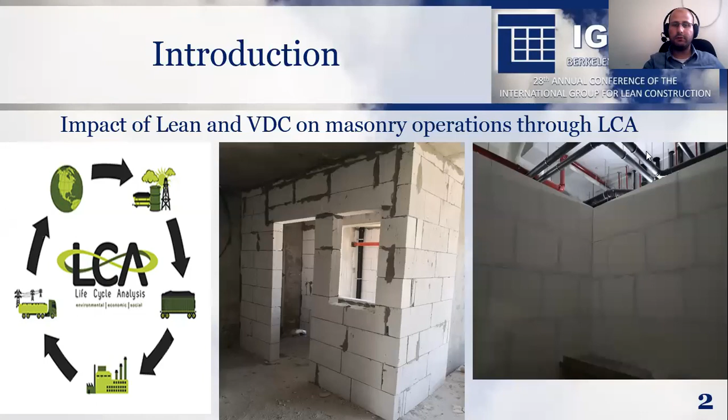Literature review. Lean production has had a transformative impact on building construction projects in which it has been applied. Waste includes the exhaustion of time, money, and energy that returns no value to the end customer, and it's the most important variable that Lean aims to minimize. Virtual design and construction, VDC, is a practice in which both construction products and related construction processes are modeled collaboratively and in detail using building information modeling tools.

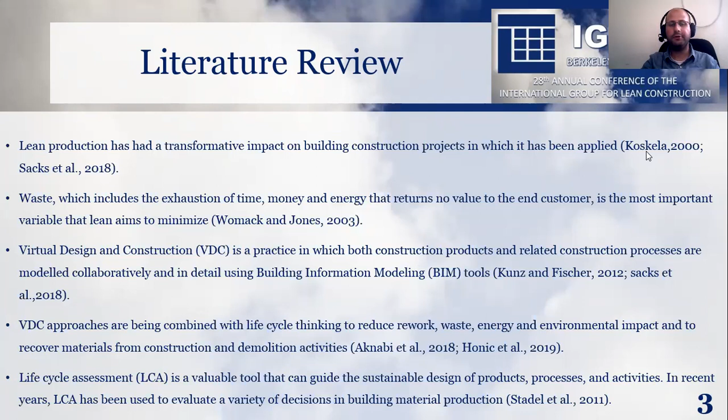VDC approaches are being combined with life cycle thinking to reduce rework, waste, energy, and environmental impact, and to recover materials from construction and demolition activities. And finally, life cycle assessment is a valuable tool that can guide sustainable design of products, processes, and activities. In recent years, life cycle assessment has been used to evaluate a variety of decisions in building material production.

The research questions, or in other words, the goals: to what extent can Lean and VDC improve masonry block operations? Can they reduce the non-value adding activities? Second, how can they reduce the wastes, which we can translate to: what are the environmental impacts?

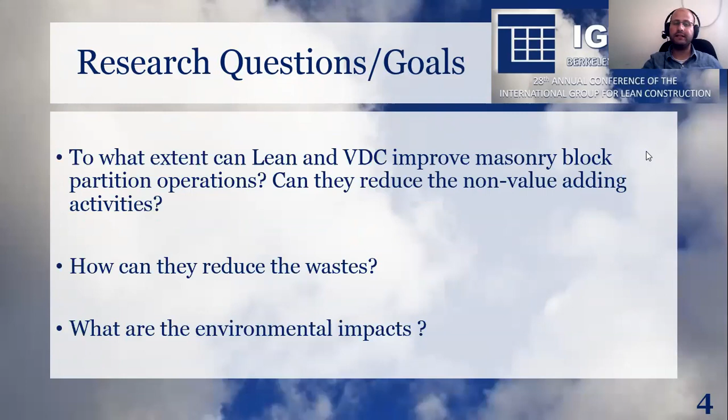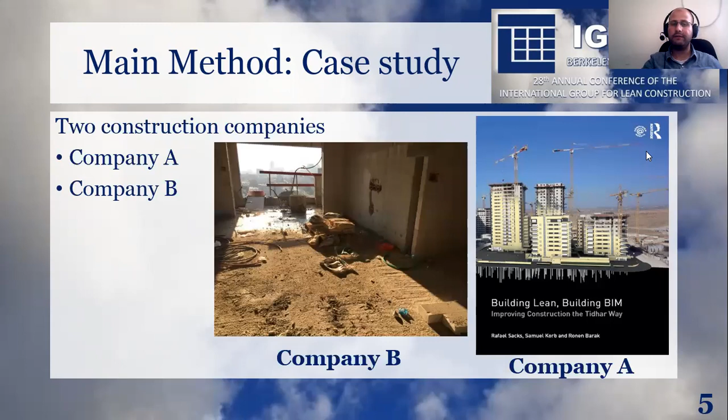The main method is a case study. We studied two construction companies. The first company, Company A, is Tidhar Company. It's a leader company in the area of Lean and BIM. They started their Lean and BIM journey in 2011. The second company is Company B, which until now works in the traditional way, or in other words, the original process. In the quantitative research sources in this study, we include four projects.

Two of them had already been studied by Technion in 2007 and 2014 and are related to Tidhar. The third project is a project for Tidhar, but after they started Lean and VDC, in 2019. And the fourth project is a traditional project from a company in the market.

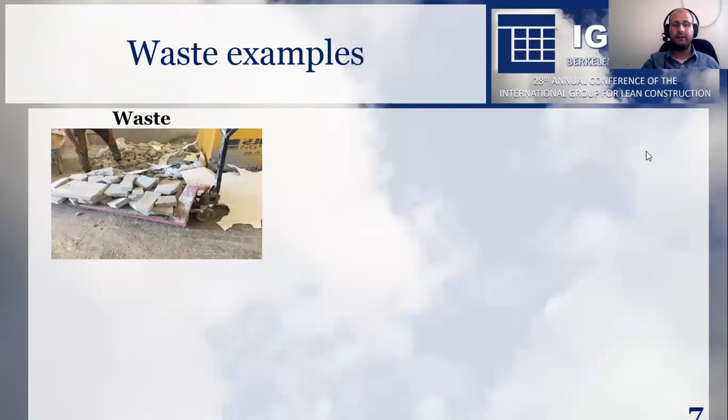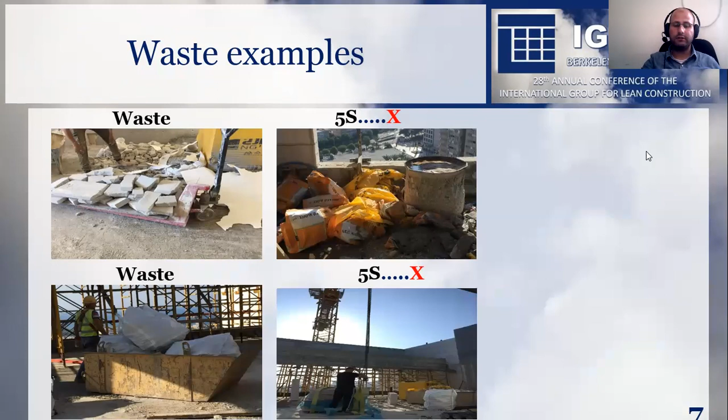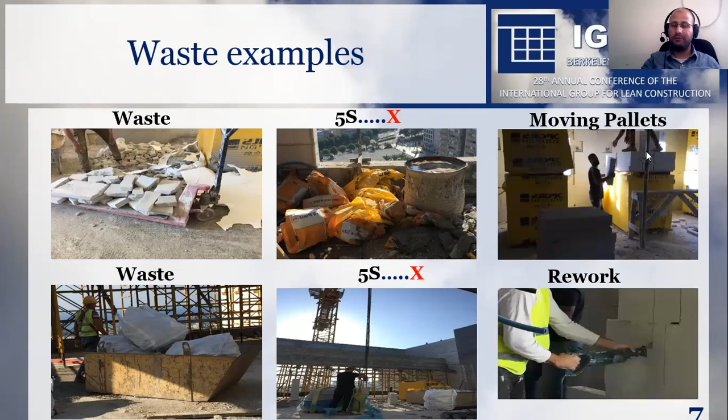There are some examples of waste in the traditional company. Here we can see waste of materials. The 5S, like here, the site is not clean, the work environment is not sorted. Also, the workers don't take safety considerations during the construction. Moving pallets and lack of coordination between different contractors and disciplines lead to a lot of rework.

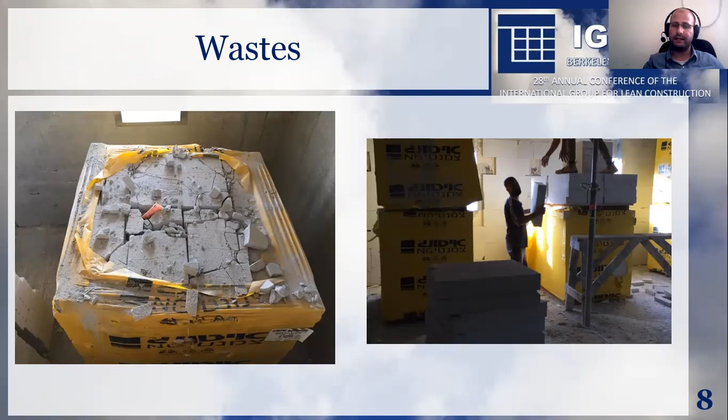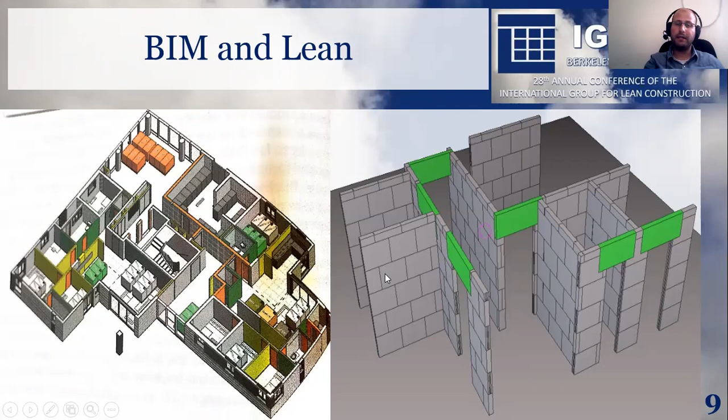Now, at Tidhar, which implemented BIM and Lean, they modeled all the walls using Revit, extracted the quantities from the model, and made a plan to distribute the different types of blocks. They used white gypsum block, green gypsum block, which is used to resist water in the toilets and kitchens, and the Ytong block. Also, they modeled all the blocks in their model in order to see the proper size for the blocks, so they minimized the cutting. They made the blocks a multiple of the wall.

Now, findings. The results were eye-opening. Project A1, which is traditional, the value-adding activities was 34.5%, and this in 2007. Now, when we made the study in 2019 in the traditional project, we see that until now the value-adding activities are only 35.8. There is no improvement.

While in 2014, when Tidhar made the study to evaluate what is the lean impact, the value-adding activities increased to 63.6%. Now, when we measured it in 2019, for lean and VDC, the value-adding activities increased to 68.4, and this is due to the role of VDC in reducing the cuttings.

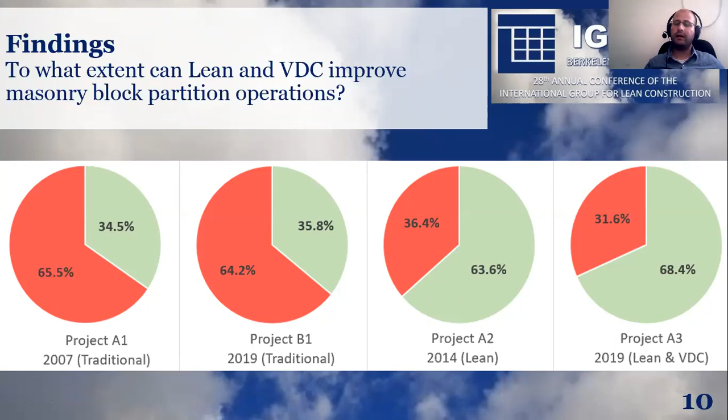Now, this table shows us the comparison between the four projects for the work activity. The first row shows us the value-adding activities for the different projects. Now, the non-value-adding activities here, we can see that in the traditional project it's 12.6, reduced to only 1.3 in the lean and VDC. Moving pallets reduced from 19 to 4.8. And for the other, cleaning, marking out, scaffold.

And the last one shows us that design changes are reduced in project A2 to 5.2 in lean, which shows us that even if we implement lean separately, it has a significant role in reducing design changes.

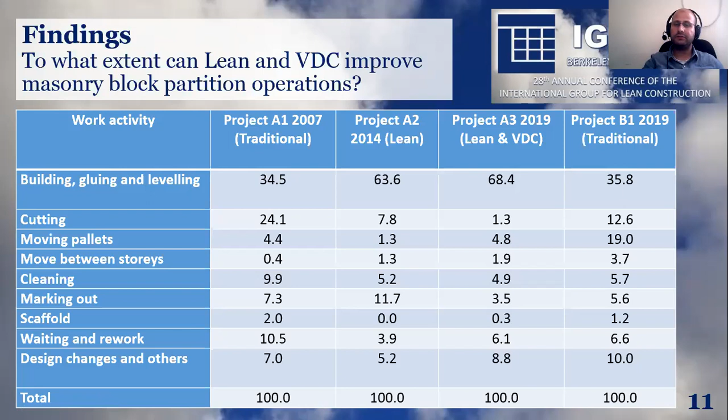Now, in order to answer the second question, waste and what is the impact of lean and VDC in reducing the environmental impacts, we made a comprehensive life cycle assessment for the whole supply chain of blocks, from manufacturing, transporting the blocks to the construction site, and transporting the waste to the landfill.

We see that both projects are approximately the same scope and they have the same delivered quantities, 2,225 and here 2,313. Now, if we look at the delivered waste volume, we see that in the traditional management the amount of waste is 463 cubic meters, while in the lean and VDC it's less than half, 220.

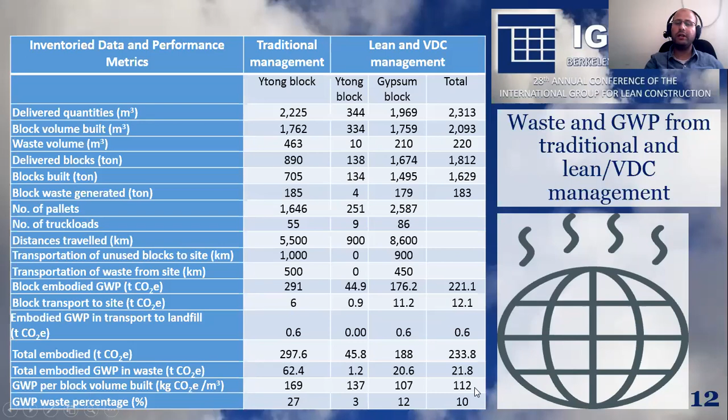When we made the global warming potential measurement in terms of tons CO2 equivalent, the total embodied global warming potential in waste in the traditional project is 62.4, while in the lean and VDC it is 21.8, which is one third. In terms of global warming potential per block volume, we see that in the traditional management it is 169 kilograms CO2 equivalent per cubic meter, reduced to only 112 in lean and VDC management.

Now, we made a hypothetical case in order to remove the effect of material type. We used only gypsum block in both the traditional management and lean and VDC. We removed the Ytong block in order to remove the material effect.

Now, the delivered quantities are the same, the amount of waste is the same, but when we made the total embodied global warming potential in waste, in the traditional management it is 46.7, reduced to 21.6 in lean and VDC management, which shows that even if the materials are the same, lean and VDC have a significant impact in reducing the carbon footprint. And in terms of percentage, the traditional management has 28% of waste, which reduced to only 11% in lean and VDC management.

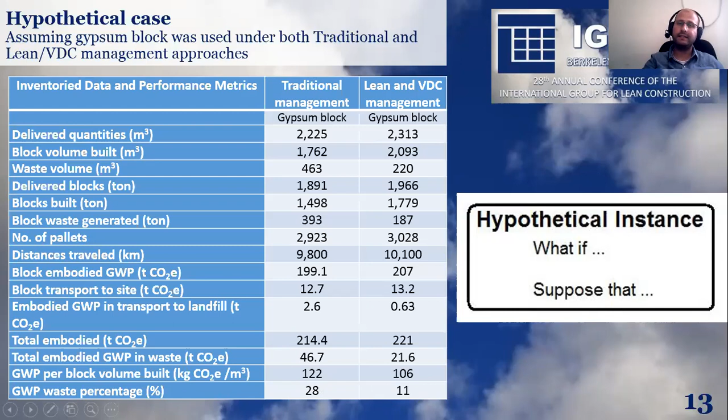Now, conclusions. We need to conclude about two things, operational impact and environmental impact. In the operational impact, lean and VDC play an important role in improving the masonry operations. They increase the value-adding activities from 35.8 to 68.4. They reduce the moving pallets from 19 to 4.8 and the cutting from 12.6 to 1.3, and also moving between storeys from 3.7 to 1.9.

And it shows us that even if we implement lean separately, it reduced the design changes by half, from 10 to 5.2. Now, in the environmental impact, it shows us that lean and VDC reduce the block waste from 463 cubic meters to 220 and reduce the total embodied global warming potential from 62.4 to 21.8 tons of CO2 equivalent, which in percentage reduced from 27% to only 10%.